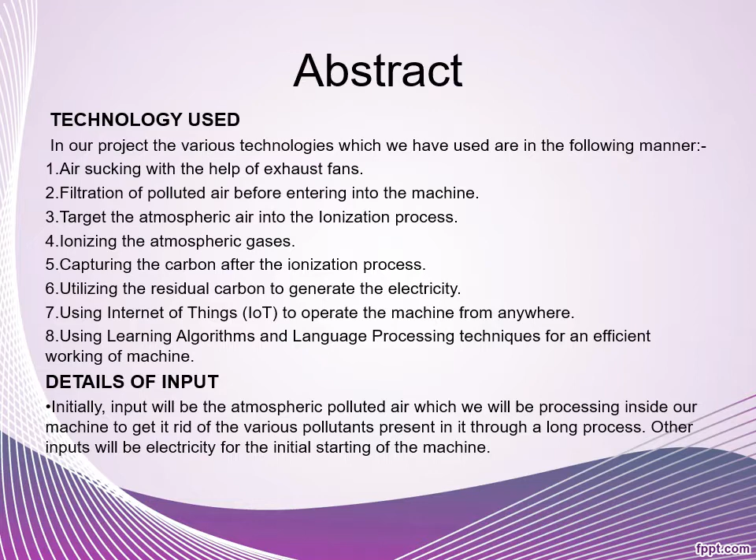Details of the input we have used: obviously the polluted air, which is the input here in this machine. And obviously the output is the clean air, which is clean from carbon and other harmful components, gases, compounds, etc.

Now come to the evaluation parameters. The evaluation parameters of our machine are based upon the amount of air we put into the machine, the amount of time taken by the machine to process it, the amount of electricity generated out of the byproduct, and the total amount of air purified after this process.

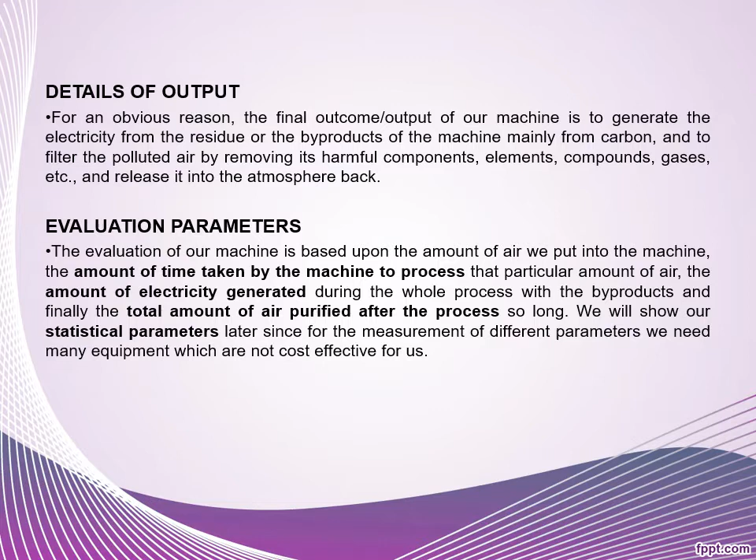Now, if we consider pollution, the general definition of pollution is the introduction of contaminants into the natural environment that causes adverse changes. This is called pollution.

It can be of any type: air pollution, light pollution, littering, noise pollution, plastic pollution, soil pollution, radioactive pollution, thermal pollution, visual pollution, and water pollution. These are different kinds of pollution. But here in this project, we are considering only air pollution in general.

Now, the major pollutants need to be considered, and sufficient cleaning technologies are chosen. For particulate matter, we use mechanical particulate filters and electrostatic precipitators. For gases, we have used solvent type technology.

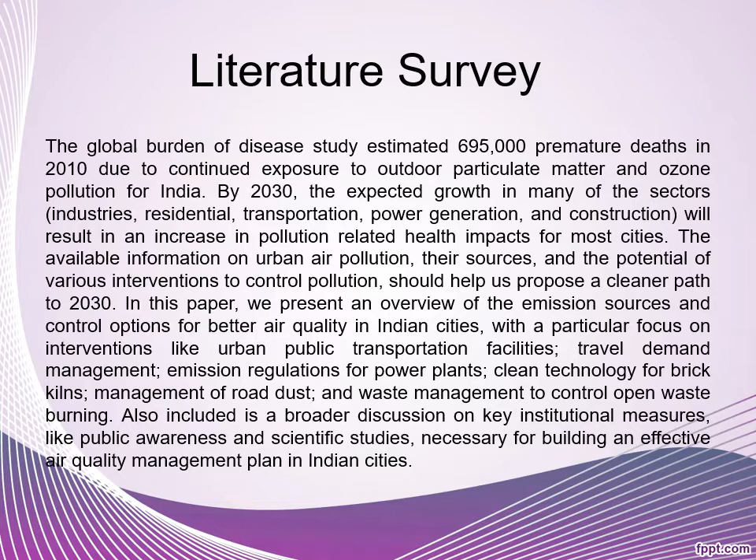For suspended particulates, there is an assembly of fabric filter bags, commonly called a bag house. A typical bag house comprises an array of long, narrow bags, each about 25 centimeters in diameter, suspended upside down in a large enclosure.

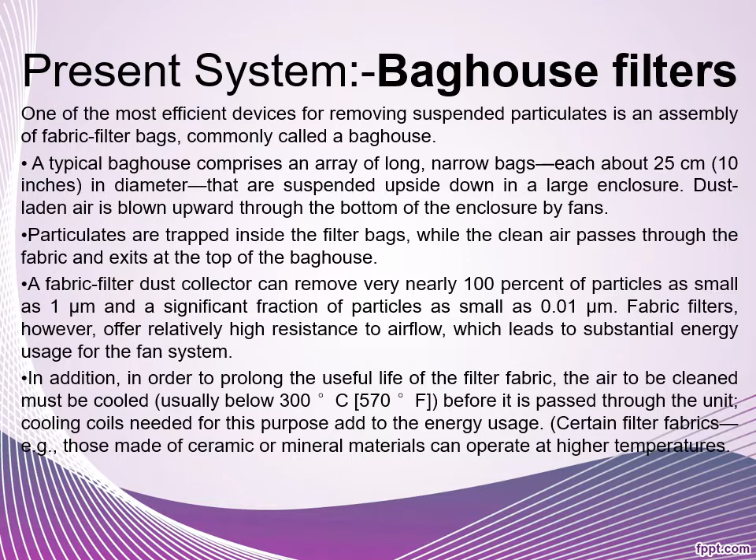Fabric filters, however, offer relatively high resistance to airflow, which leads to substantial energy usage by the fan. So, as you can see in the bag house filter, the energy consumption is very high. Some energy is consumed in cooling the coils, some in running the large fans and other components. So, in the present system, as you can see in this picture, the bag house enclosure, the bag house filter, is shown in this figure.

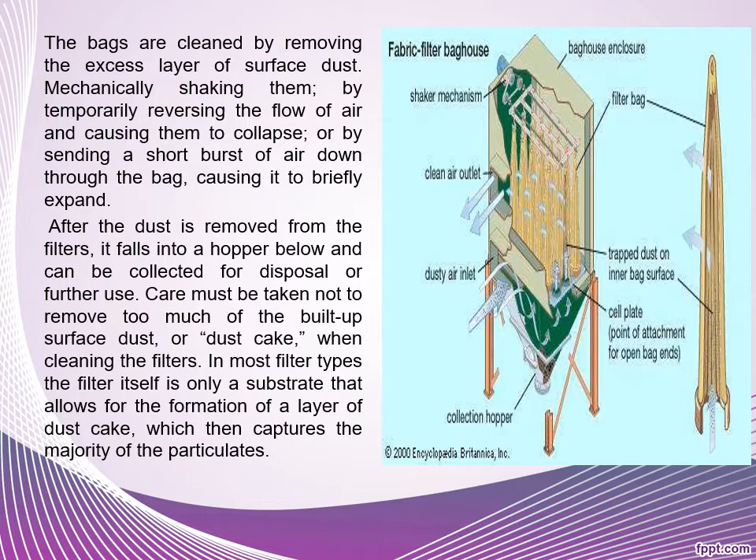Control of the gases. Gaseous criteria pollutants as well as volatile organic compounds and other gaseous air toxics are controlled by means of three basic principles: absorption, adsorption, and incineration, which is called combustion. These techniques are employed singly or in combination. They are effective against the major greenhouse gases as well. In addition, a fourth technique known as carbon sequestration is under development.

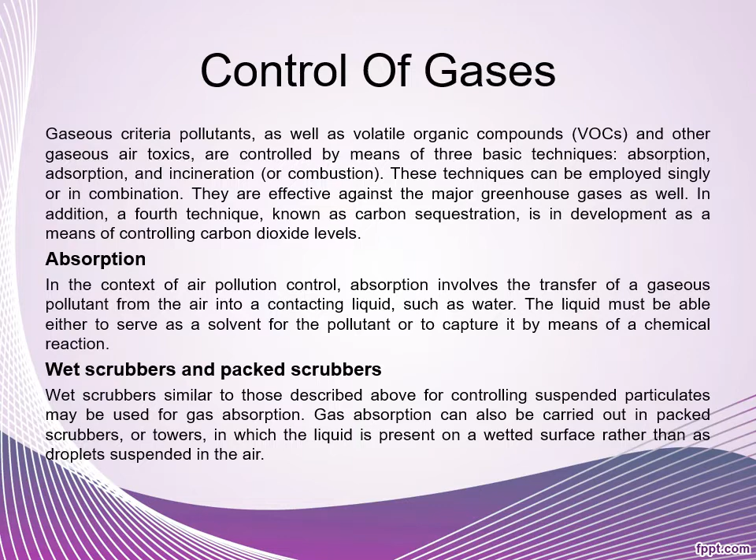Absorption. In absorption, we have a liquid which is used as a solvent for the pollutant, and then comes wet scrubbers and packed scrubbers. Wet scrubbers, similar to those described for controlling suspended particulates, may be used for gas absorption. Gas absorption can also be carried out in packed scrubbers or towers, in which liquid is present on the wet surface rather than as droplets suspended in the air.

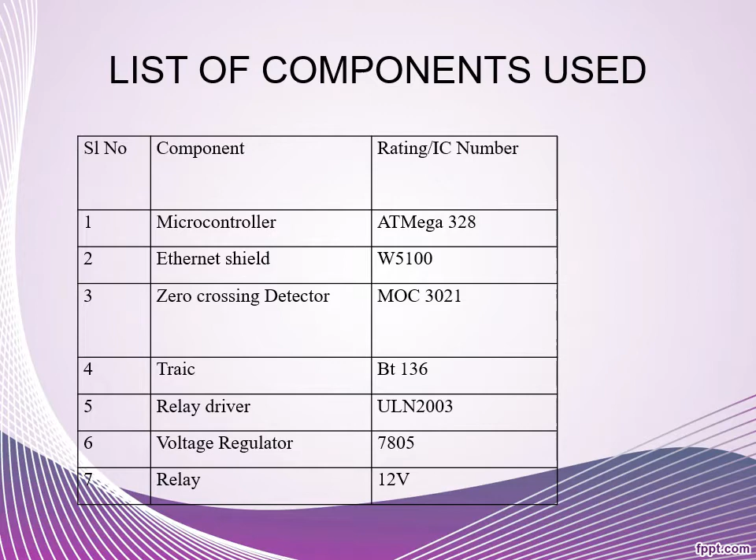Hardware and software requirements. As far as software is concerned, for AI and machine learning related activities, we need MATLAB. In terms of hardware, we need cuprous aluminum chloride. Then other salts are also needed, like charcoal, activated charcoal, sodium hydroxide, magnesium oxide, lime. These are the things that we need for hardware and software. Rest of the components that we used include microcontroller, Ethernet shield, etc. This table depicts everything.

Software analysis and design. To reduce air pollution, we have done an experiment to purify the air from harmful particles. To purify poisonous air, an electroprecipitator can be adopted to remove dust, ultrafine particulate matter, smoke, smog, and microbiological contamination like bacteria and viruses from air through electrical forces.

Apart from this, a 12 feet high machine is equipped with a lot of hardware devices, and those devices are working on a combination of different technologies under the single concept of artificial intelligence.

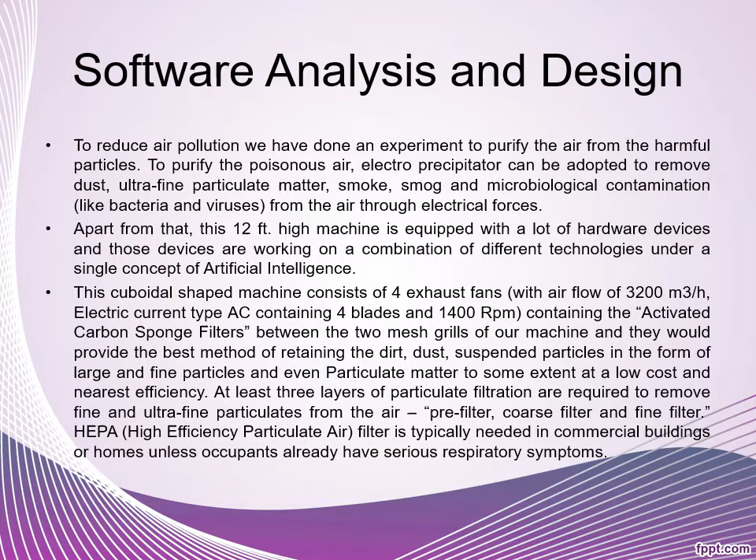Learning algorithms that we used: we have been using some self-learning algorithms so that our machine later learns itself for various actions that we want it to perform, and works accordingly based on previous tasks and past experiences. Although we will be feeding it with algorithms, soon it will be able to work on its own and will reduce the need for officials to keep continuous check on it. Hence, it will be able to process on its own. So we have used here supervised learning and reinforcement learning.

Now, electrostatic precipitation. As per the studies which we have conducted till now, we have been able to gather the list of various harmful pollutants, namely oxides of carbon, hydrocarbons, acids, and particulate matter. So this is how the electric process is done.

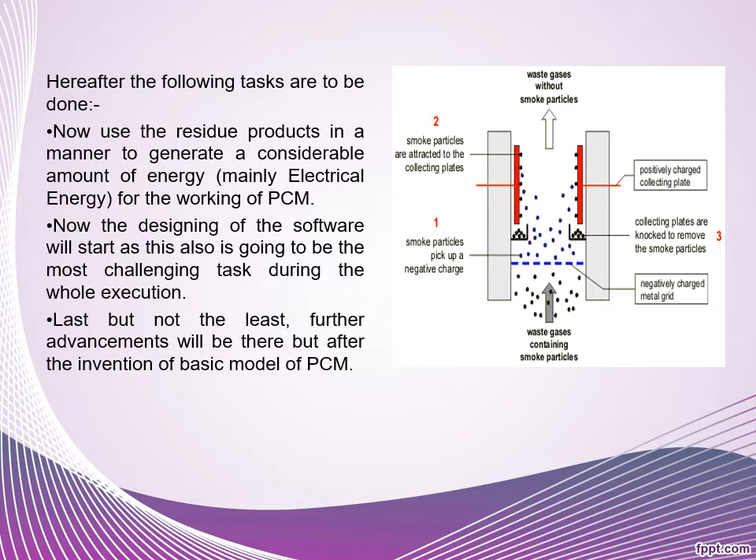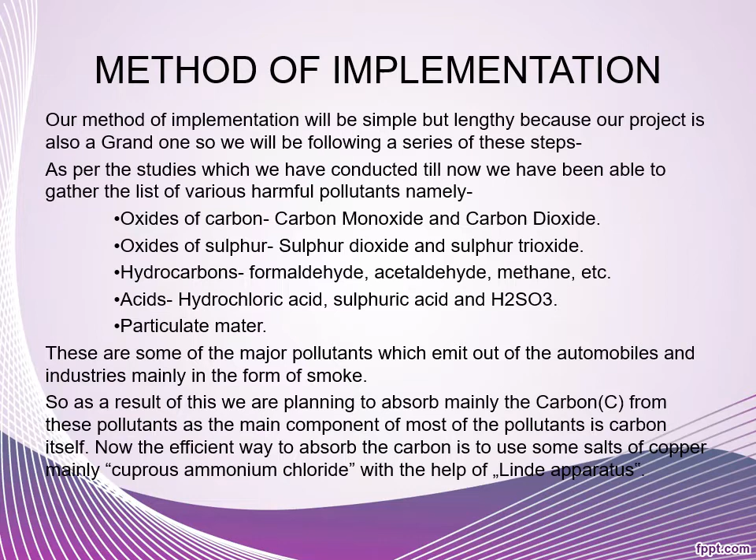We have put our machine in an open area and then created pollution by using two sources. Since it was completely an open area, it was difficult to calculate the pollution generated. But we are able to calculate the approximate result by the following assumptions. The pollution sources were kept in an open area but specifically creating most of the pollution in an area around 4 cubic meters.

Now, according to the mole concept, in open area 1 cubic meter of air weighs 1.225 kg. So 4 cubic meters of air would weigh around 5 kg. Therefore, we have around 4 to 5 kg of polluted air, and as far as our motors are concerned, we are able to predict that around 70 cubic meters of air is taken by the fan in a minute. So out of 5 kg, 1.5 kg of polluted air is sent for filtration.

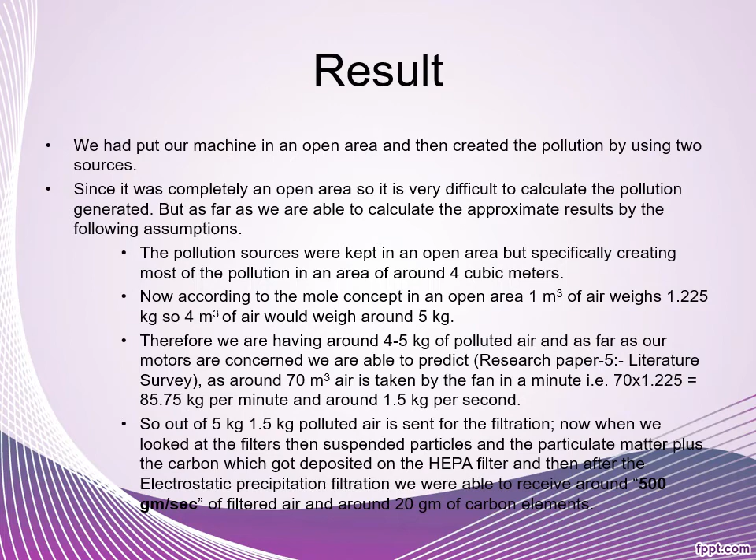There are six AQI categories, namely good, satisfactory, moderately polluted, poor, very poor, and severe. The proposed AQI will consider eight pollutants: PM10, PM2.5, NO2, SO2, CO, ozone, NH3, and Pb, for which short-term national ambient air quality standards are prescribed.